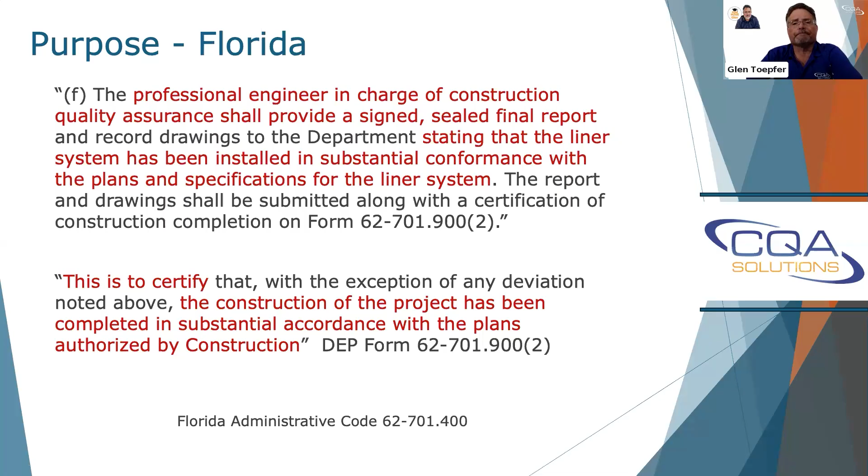And I think I'll talk about this as we go through this. The expertise is kind of a gray area for some. And I think that's an area that might need to be addressed in the future.

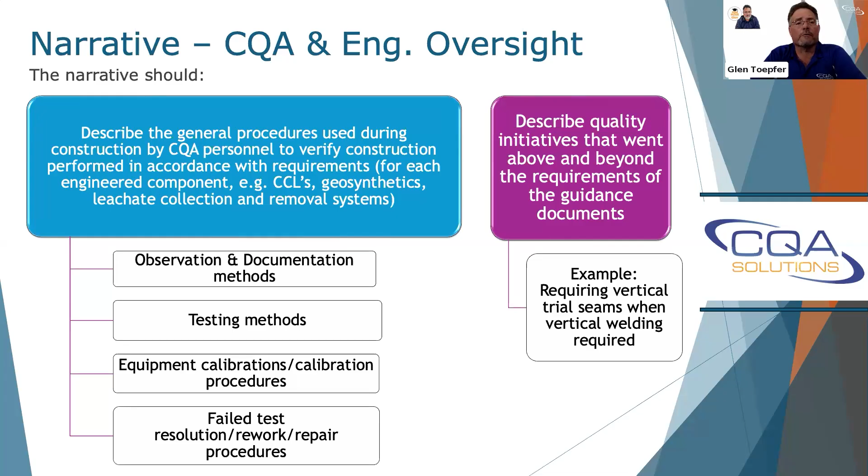There's usually going to be a conclusion in your narrative, summarizing why the activities described in the report meet the regulatory requirements. And I don't know what happened to my text there. Somehow my text disappeared. Oh, there it is. Contain references to appropriate appendices. We read the narrative, and we'll get into it in our findings here, but appendices are misreferenced. The information isn't there. But I'll talk about that here in a minute.

So what do we find in the narrative? We find all kinds of things. And, like I said, the project description's incorrect or incomplete. I just throw the report back to you at that point. I mean, I don't even want to look at it any further if I'm the regulator. Stated project construction practices don't match the supporting documents.

Say a CAT 825 was used for the compaction, and the forms and the daily field reports will contain an 815. So what was used? The photos, can you look at the photos? A lot of times, unfortunately, the photos are missing, or they don't show the logo or don't show what it is. Sometimes you can't answer it based on photos.

The thicknesses and compaction of materials, they're missing. Testing equipment substitutions were made. They're not documented. They're not even approved necessarily. We've had e-gauges used in place of nuclear density gauges that we found, and there was no approval granted. You couldn't find any variances. Issues that are not mentioned, not properly repaired when they're stated to be. You look at the field work reports, quantity of materials don't match.

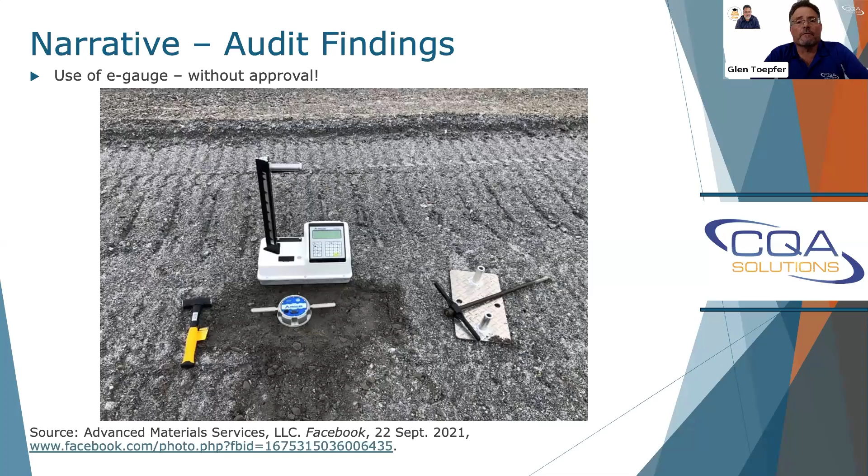So, things like that you want to look for in the photos. As a regulator, you should familiarize yourself with the gauges, what type of gauge is approved. Some might be a CPN, Troxler, the other manufacturers. Are they taking the tests at the appropriate depth, the requirements? You should familiarize yourself so you can recognize if you're out there in the field things that don't meet the spec, or you can recognize it from photos. So those are just some tips there.

Getting into project personnel and the requirements. What we find, unfortunately, is personnel are incorrect and/or missing a lot of times. There's names on resumes submitted. You start looking at the actual daily field reports, you start looking at logs for the different earthwork or whatever the logs may be, geosynthetics logs, and you'll see initials and they don't make any sense. And you find out that those personnel weren't even on the project. A lot of times personnel experience doesn't meet that required.

This middle one is a big one that we're trying to work on. How do you actually make this more of a solution in the industry? We try and offer training for this reason, but experience doesn't equate to actual knowledge. People can have 100 years of management, but if they've never been out there, they never experienced it, that knowledge may or may not be enough to actually properly manage and oversee a project.

Field CQA people have no clue what their responsibilities are. That's another big one. Most people think they're out there just to document, and most engineers think that's what their role is, but they really need to be keeping an eye on what's going on and making sure that the project's being properly installed.

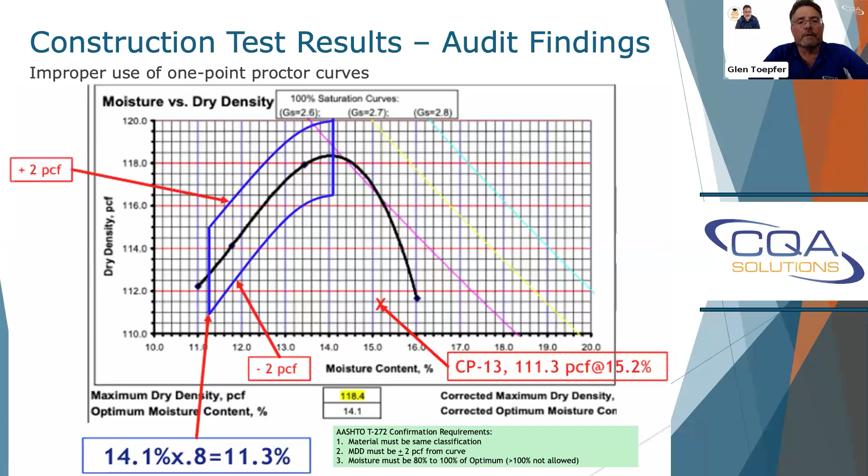And how do you as an engineer certify that? I don't understand that, but it even was worse than that. There were 25 out of 30 or so that actually failed to verify the proctor, that were stated to verify the proctor.

And so I ask you, regulators, this is a question, you find this in a report that's submitted to you, 25 of these 30 tests didn't verify it when they're stated to verify it. What do you do? I mean, how do you make that work? What's the engineer required to do in that case? And engineers, what do you do? You receive comments back. 25 out of 30 stated to verify the proctor and don't. What do you do? It should never get to this point, but far too often it does.

What do you do? It's kind of confusing. Some more audit findings, just highlight a few: drive cylinder moisture verifications as well of the nuclear gauge are performed. They're not correlated back to the proctor. When we correlated them back during our audit, 50% of them failed. So you've got acres of material that's constructed here that's actually failing when you correlate it back. What do you do? It shouldn't ever be there.

Outdated calibrations, no documentation about test penetrations. I'm just picking a few to keep moving. Desiccation allowed and approved. Here's a photo of desiccation. For that example, it was verbally approved by the regulator. So I think as a regulator, again, you guys need to be careful what you're saying, the reasoning behind this. The regulator said it would heal itself.

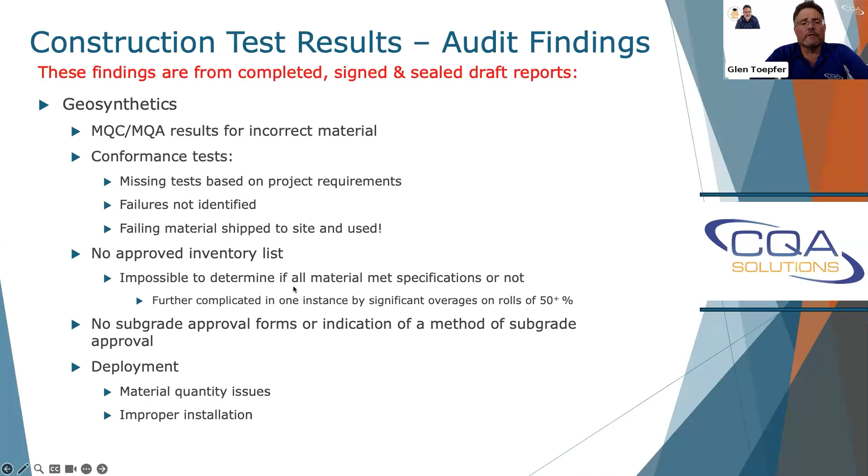And in one instance, it was further complicated by overages when you start looking at rolls, and you had 50% overages. So a 400-foot roll you had on deployment logs is 600 feet plus of material. Doesn't make sense. Deployment issues and improper installation. One of the things here, I've touched on it in other webinars too. Your textured surface, you have a textured material, they're deploying it one side up here, the other side up here. Which side's supposed to be up?

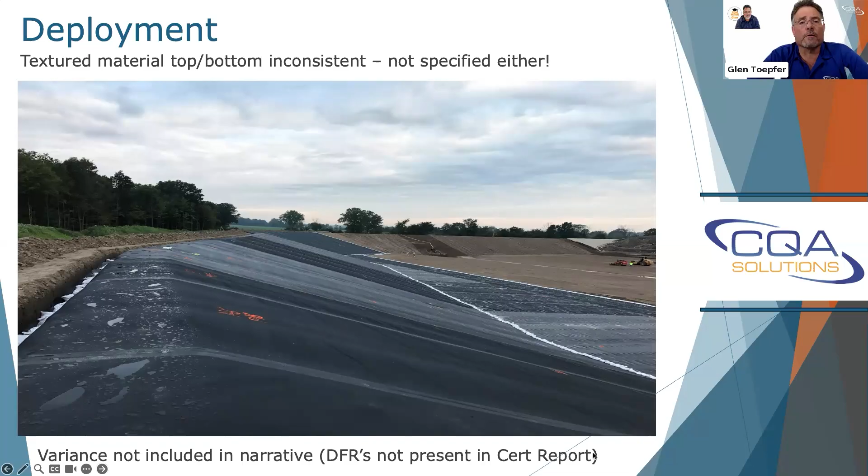Trial seams, I could get into a lot of things here. I'll just highlight a couple things: failures not identified. Operators and equipment with failures were allowed to seam. Coupons weren't properly tested. Production seaming, you name it. Basically, we've found it in auditing, and it's unfortunate, but again, that's really the reason why I'm trying to share this with you. Hopefully, you guys can catch more of this as you're reviewing your own certification report, regulators as you're reviewing things, maybe take a more in-depth look at what's going on, compare things.

More geosynthetics, non-destructive testing. One of the things that I wanted to illustrate here, equipment sometimes doesn't meet the requirements. Sometimes specifications exist, but they're not referenced, like the holiday spark testing. But here's from the Ohio Administrative Code: verification that whenever equipment is used to test an engineered component, the equipment is properly calibrated in accordance with the manufacturer's recommendations and specifications.

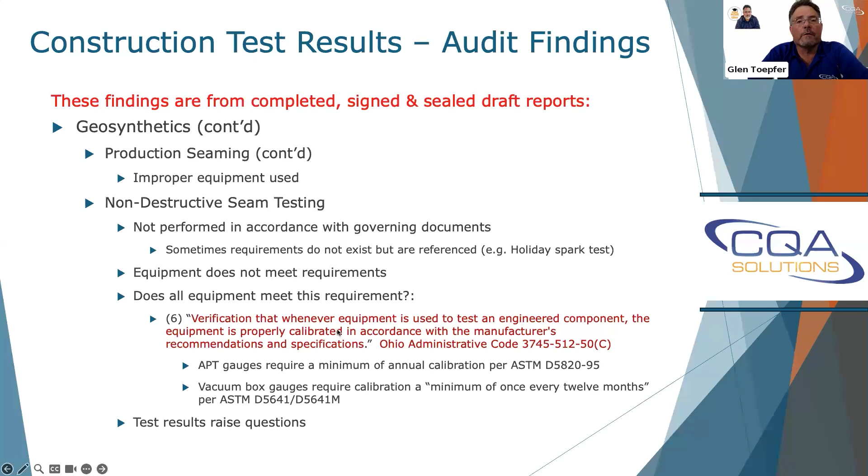Well, for air pressure test gauges and vacuum box equipment, I've never seen a calibration requirement nor a certification for them, a calibration certificate like we typically get with a tensiometer or the gauges, but the ASTMs actually require this. So does it meet the specification or doesn't it? Does it meet the code requirement? I've never seen one. Test results that raise questions, wrong equipment and improper dwell time for the air pressure. You start seeing 30-30 on every test, that should be a red flag. It takes a lot of time to try and pressurize a gauge to exactly 30.

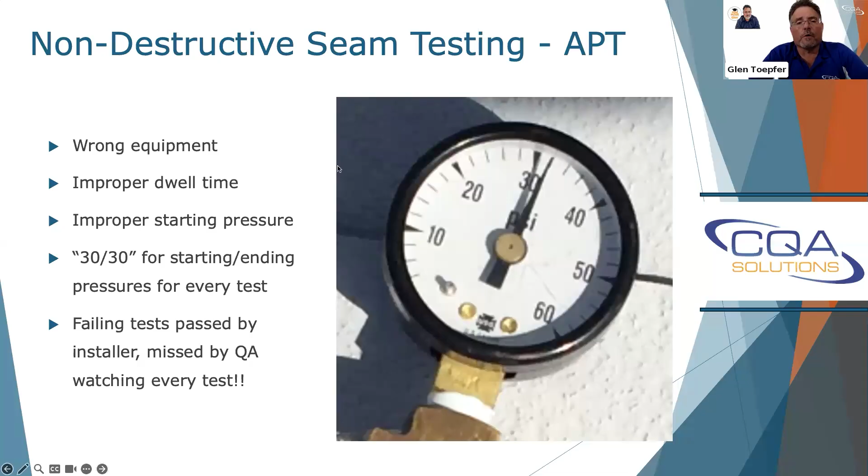And then even in this instance here, it's the wrong gauge. The ASTM requires 1 PSI gradations, and this is 2. But these were all observed by QA, all walked by an engineer during our audit. So how can this be signed and sealed? How can a regulator approve this? I don't understand, especially if there's missing requirements in the construction documents.

No. You see it quite commonly, unfortunately, in ASTM, or I mean, air pressure test specs now. They'll reference the ASTM, this one manufacturer's drop-in spec is commonly used, but it doesn't provide any minimum or maximum starting pressures, no required test duration, no pass-fail criteria in any of the governing documents, nowhere to be found.

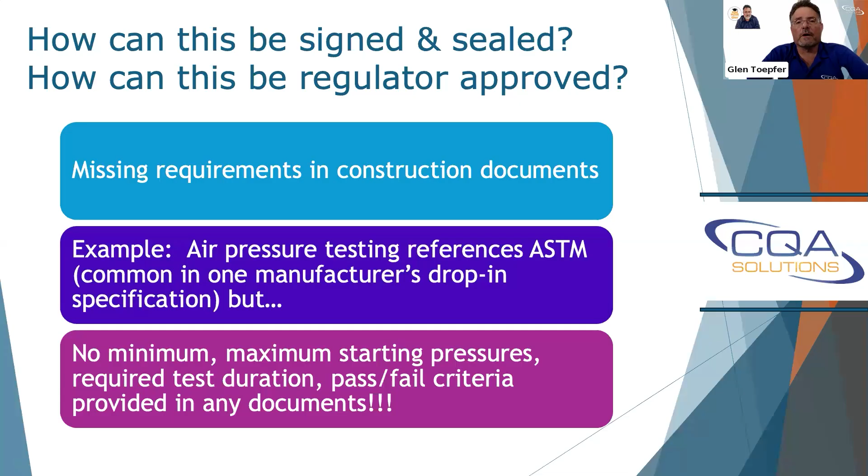So you have 9 months of air pressure testing with all kinds of different variations. Most of them say 30-30, unfortunately, but you'll have the occasional one that has like a 4-pound loss. Is that acceptable? They start at 28. Is that acceptable? What's acceptable? There's no guidance. So how can you be signing and sealing this? And as a regulator, without any guidance, how can you be approving it? I don't understand that.

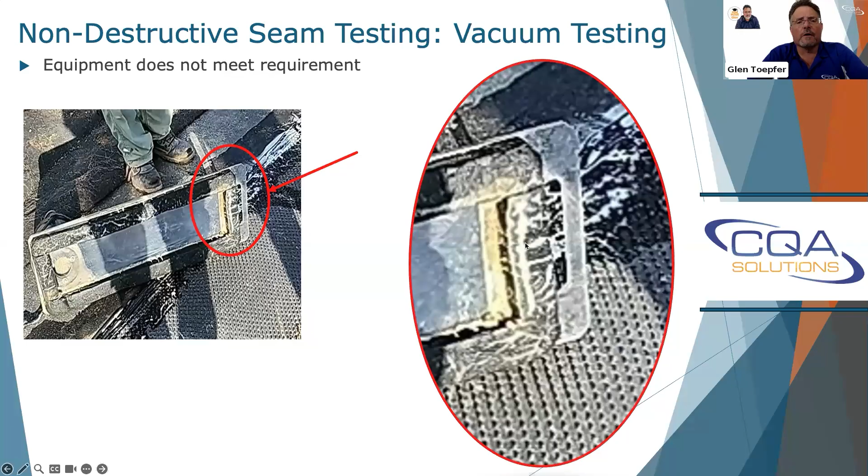Non-destructive vacuum testing, equipment doesn't meet the requirement. ASTM calls for a gasket that's functioning and creates a seal. A lot of times you'll see that it's improper, but yet, these are photographs taken actually from a project and there's issues with it.

More of the geosynthetics. One of the things that raised questions on an audit we did is 10 vacuum test leaks. They were all observed on the same day early in the project. None after that. So magically now they have no leaks. If I find a vacuum test on a project that doesn't have leaks, I'm always skeptical of it. I'm skeptical of the quality. Usually it's going to be where CQA wasn't required to monitor full time.

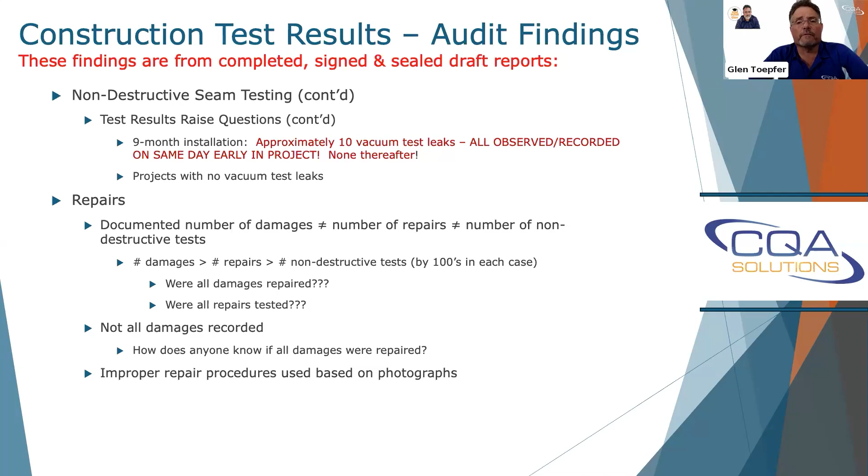Improper repair procedures. Is this a gray area or not? Here the installer is grinding, they're actually abrading per the required documents, but they're not doing it properly. They're actually cutting instead of grinding, and they're damaging the integrity of the geomembrane. So what do you do there? Where does that fall within the regulations? Where does that fall within the requirements of a certifying engineer?

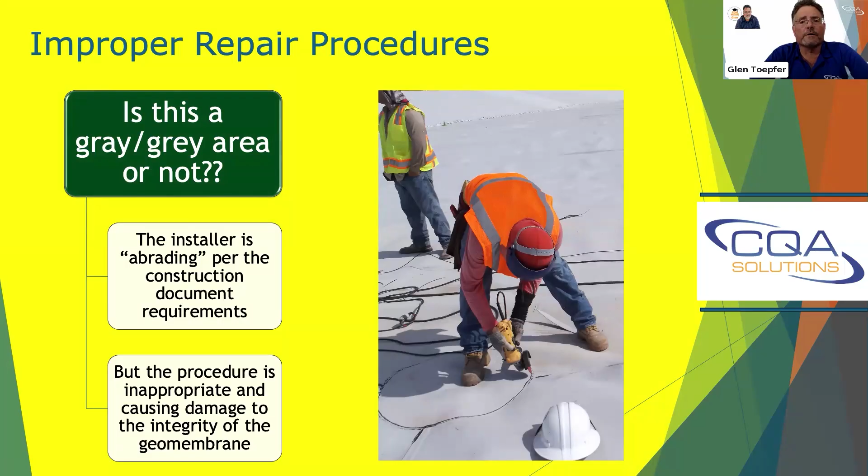Another gray area we see is this creased geomembrane from an ATV running over wrinkles. Talk to the engineer: if it's not in the specifications or CQA plan, they can't enforce it to be repaired. I disagree with that. But, from this slide, I'd ask you regulators, if gray areas exist in your regulations, how do you handle them? Especially if the photograph is a red flag to quality. And engineers, are you willing to go above and beyond the regulations to ensure quality when you do run into these situations?

An example here from the Ohio Administrative Code again is that the engineer is supposed to make sure that there's a demonstration that the integrity of the engineered components was maintained during construction. So, to me, those creases need to be repaired. But is that something that the agency is going to enforce or not? Can you identify it? Those are all questions that unfortunately I don't know the answers to, and a lot of engineers aren't willing to gamble with it. Well, they are willing to gamble with it. They'll let it go, and maybe it shouldn't be let go.

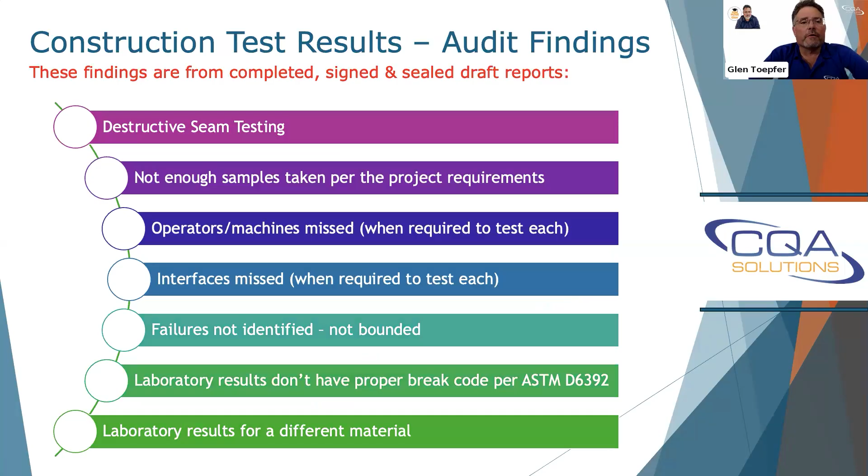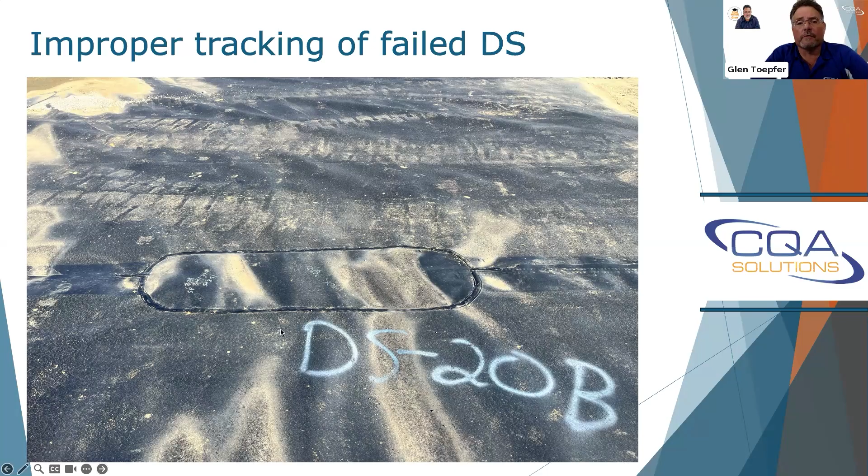Yeah, destructs again, the same thing. And to speed it up here a little bit, I'm just going to skip over it. Photograph here really shows what I'm talking about there. This destruct, they actually took the time to bound it. So that's good. They got a bounding destruct, but they never repaired the seam. You look at different photographs, the seam was never repaired. It should have been repaired per the specifications required between the two failures, and it wasn't. So that's something to keep in mind when you're looking at photos.

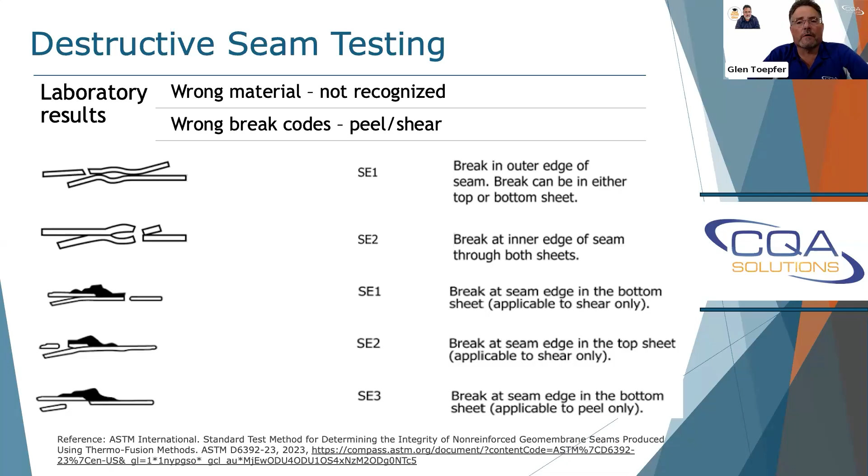Other things, we've seen destructive laboratory results come back. I mentioned this, I'm sure, in a previous webinar, but codes applicable to only shear coming back for peel, and same applicable to only peel coming back on shear test. Doesn't make any sense. It doesn't give you any comfort in the laboratory testing personnel, which is why, when you come across these, what do you do? It's just, yeah, mind-boggling, I guess is the best word I have for it, unfortunately.

RFIs and variances, documentation showing these approvals should be included in the certification report. What we find is, they're often not referenced in the narrative. If they are referenced, they're not included in the report. So now you still can't piece it together. At least as a regulator, you can go back and ask for it, and get it. But sometimes they're not referenced in the narrative, and you got to figure out why this was done.

You really need to know the construction documents, the specs. You need to know the regulations, what's required. Survey data. Usually they're going to require survey tables showing that the elevations, grades, thicknesses, and such are all properly constructed and illustrated in a supporting table along with the as-built.

Surveys are often the least commented on section of the audits, at least the survey data themselves. Observed issues: sometimes we'll see data missing from the tables, incomplete tables, transposed coordinates where eastings and northings are transposed. Sometimes that's just using GPS, people have it switched backwards or something like that. But most of the time, the survey data is going to be in pretty good shape. So that's a positive.

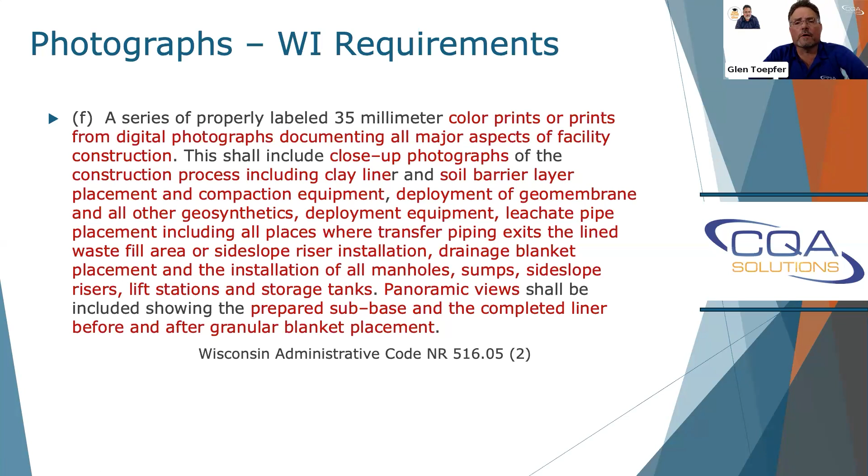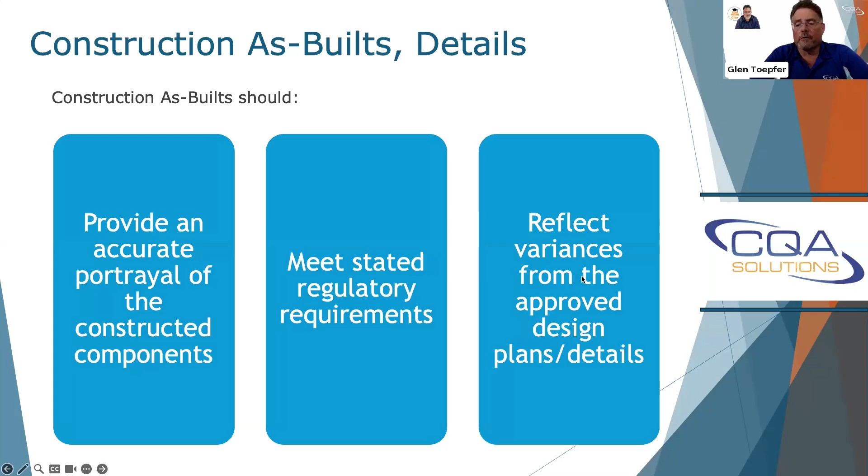But I'll get on to the as-built and the details of construction as-built. They should provide an accurate portrayal of the construction components, meet the regulatory requirements, obviously, and then reflect any variances from the approved design and plans. And what we often find is things are missing. We've found features that are supposed to be constructed, as I said, completely missing. They're not constructed in accordance with the details when you start looking at photos, do site walkovers, with no known variances or RFIs.

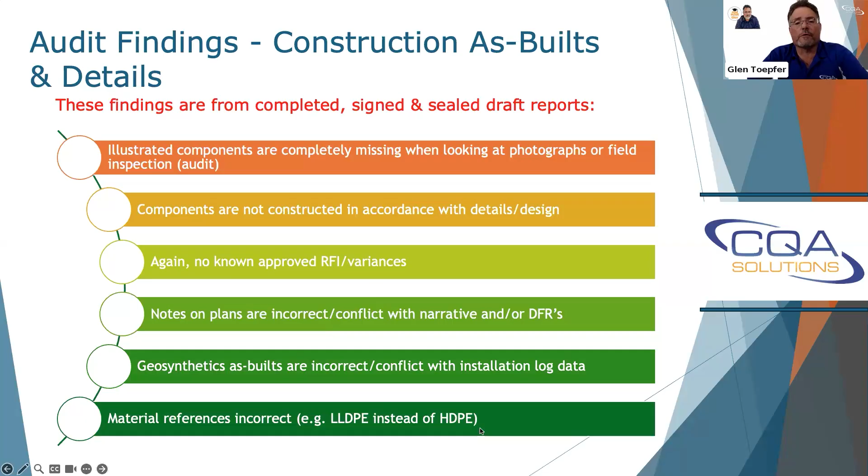Notes on the plan sometimes are incorrect. Wrong callouts like LLDPE instead of HDPE. Can be minor, but it's still a question. And you got to be really questioning, did they install LL or did they install HD? You've got to dig into it a little further than just saying it's a typo. It really should be looked into.

So it all boils down to the construction certification statement by the engineer. Again, we started in the beginning with this. They're signing a report, signing and sealing, attesting that construction was performed in conformance, compliance with a permit or other authorizing documents, such as the design construction plan, CQA plan, and technical specifications. But my question really to you as an engineer, could you sign and certify many of these examples that I've presented that we found in our audits? And as a regulator, could you accept that? How do you accept some of these things we've found?

Then getting to my recommendations here for regulators. I think training is critical both for regulators and engineers, training and experience in field construction for any of the engineered components that you're going to be reviewing is crucial. That way, you know what to identify.